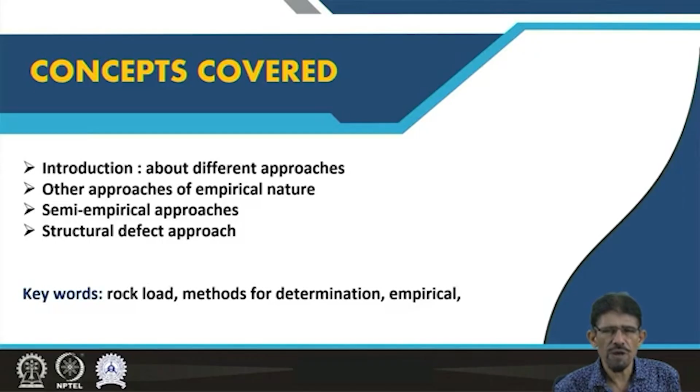As you know, we have estimated the rock load using the concept of Terzaghi for 9 rock classifications, and added RQD as per suggestion proposed by Deere et al in 1970, based on Terzaghi classification proposed in 1946.

Besides this, we have approaches based on rock mass classification carried out by Bieniawski from 1967 to 1973, then rock mass categorization proposed by Barton et al in 1974 in terms of Q index, and later utilization of this Q system and RMR by other workers who derived rating systems and indices.

As far as this rock mass quality index is concerned, the rock mass quality Q is a very sensitive index and its value ranges from 0.001 to 1000.

Between 0.001 to 1000, Barton and his co-researchers have divided the rock mass or rock strata into certain categories. You can see 3 columns here along with some adjectives - these adjectives attach with good as very, extreme, exception.

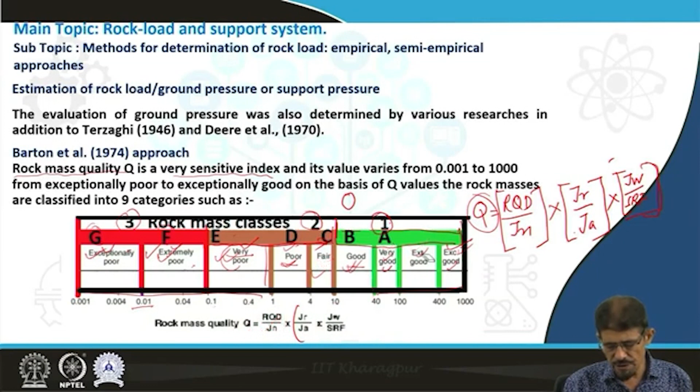A rock of particular nature, or rock strata of particular nature, having specific shear strength and located in a particular surrounding condition, can be quantified with the help of this index, philosophically written as Q. Utilizing this Q index, a number of researchers, workers, and geotechnologists have determined rock load or ground pressure.

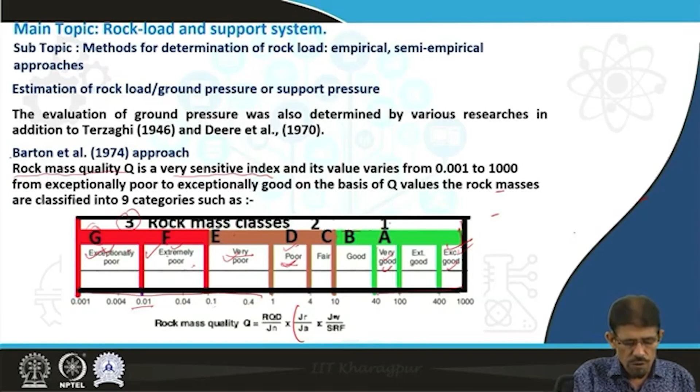The approach made by Barton et al. in 1974, based on Q, estimated the rock load. PV represents vertical pressure. The vertical pressure can be easily calculated using the concept of JR, joint roughness, and the rock mass quality index: a very simple relation, 0.2 by JR multiplied by Q power minus 1 by 3.

If we are going to create an opening here, you can see this is the strata where we create this opening. Due to creation of this opening, there is formation of a damage zone. This damage zone creates rock load, or ground pressure, or support pressure on the support system we are going to install.

The load acting vertically on the crown side of the excavated opening is recognized as PV, where the wall side pressure we recognize as PH. So PV is equal to 0.2 by JR multiplied by Q power minus 1 by 3.

However, in case of the wall side pressure, it is the same formula: 0.2 divided by JR multiplied by QW, where QW means Q for wall condition, power minus 1 by 3.

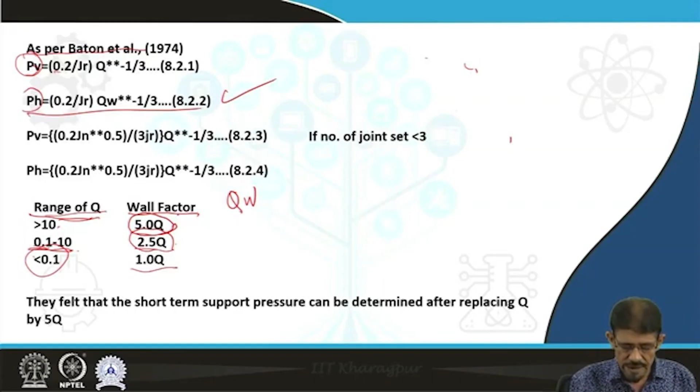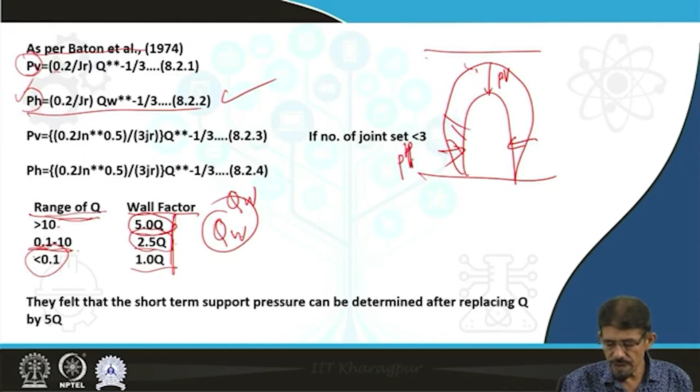Utilizing this value for QW, we estimate the pressure acting on the walls of the opening. This is the damage zone. This side is horizontal pressure, here is pressure PV, here is PH.

Condition: if the number of joint sets present in the geoground or rock mass is less than 3, then PV requires some modification. A simple modification: 0.2 times joint number power 0.5 (half), divided by 3 JR, overall multiplied by Q power minus 1 by 3. For the horizontal pressure acting on the wall side: 0.2 Jn power half divided by 3 JR, multiplied by Q power minus 1 by 3.

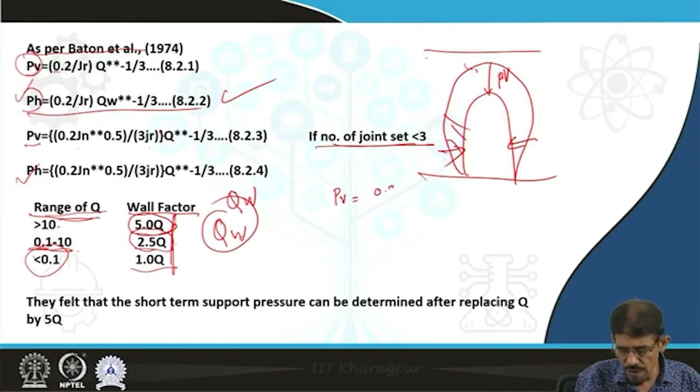PV is equal to 0.2 Jn power half divided by 3 JR, this multiplied by Q power minus 1 by 3.

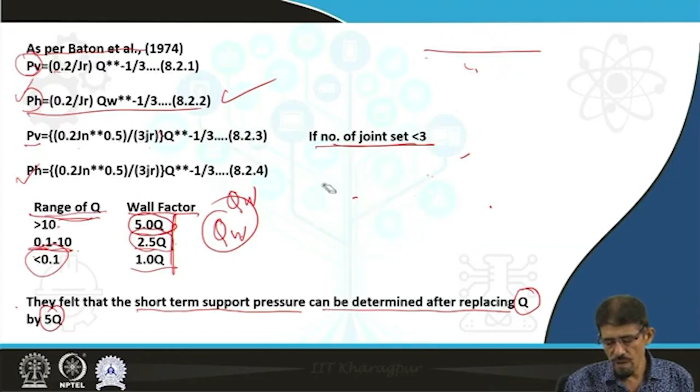In case of PH, the same formula: 0.2 Jn power half by 3 JR, multiplied by QW, Q for wall power. They found that the short-term support pressure can be determined after replacing Q by 5Q to get a more compact and authentic result, as per their consideration.

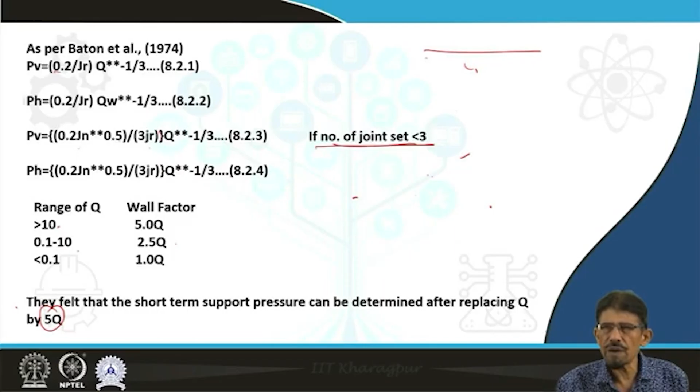Using the same concept with some modifications, Unal utilized RMR parameters, which we discussed previously. Ground pressure PV can be measured in terms of RMR, unit weight of rock, and width of opening: 100 minus RMR, divided by 100, into unit weight of rock mass and the width of opening.

As per Goel and Jethwa, 1991, they proposed ground pressure PV is equal to 0.75 B power 0.1 into H power half, minus RMR divided by 20 RMR, with results measured in MPa.

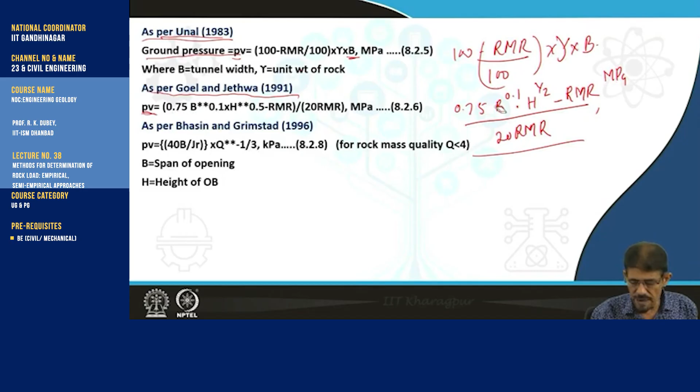Similarly, Rajendra Bhasin and Grimstad, 1996, proposed the measurement for ground pressure as vertical pressure: 40 B by JR multiplied by Q power minus 1 by 3, measured in kilopascal.

This condition was applicable for rock mass quality, meaning Q value less than 4, where B represents the span or width of the opening, and H is the height of overburden. Suppose the tunnel is located here below the ground surface; H is the height above the crown.

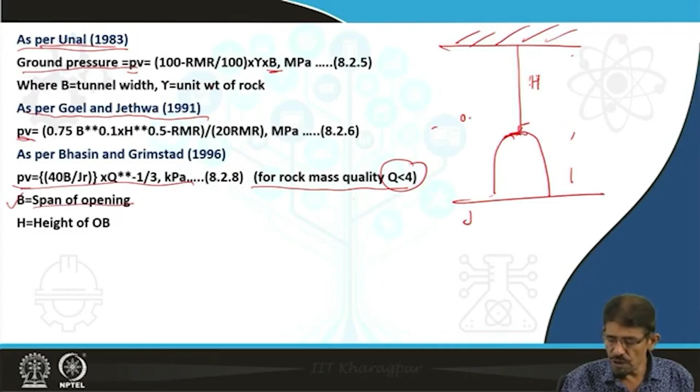This height we are recognizing as height of OB, where B is span of opening. In case of rectangular type of opening, and in case of circular type of opening, we are considering diameter.

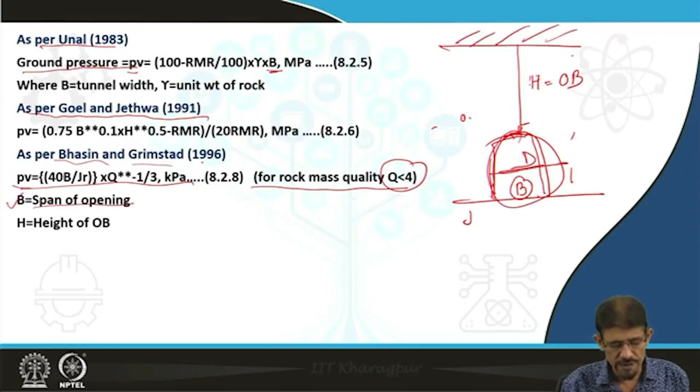So these are some of the approaches, in addition to the approach made by Terzaghi in 1946 and modified by Deere et al. in 1970. Then the calculation suggested by Barton et al. in 1974 for vertical pressure and horizontal pressure. Then a similar concept for vertical pressure was calculated by Unal in 1983, based on the rock mass rating system proposed by Bieniawski in 1967 and 1973. Then the calculation suggested by R.K. Goel and Bhawani Singh in 1995, also suggested by Goel and Jethwa in 1991, and then by Bhasin and Grimstad in 1996, both from the Norwegian Geotechnical Institute.

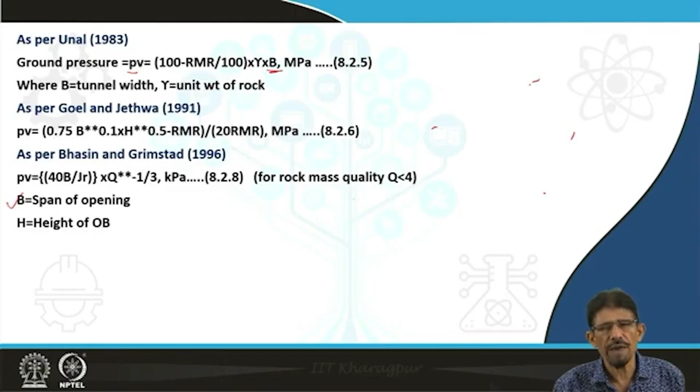In addition to this empirical relationship, day by day we are utilizing these to develop more empirical relationships for calculation of rock load, and there is a lot of scope for working in this direction. We are still lacking exact calculation of vertical and horizontal pressure, particularly in squeezing and swelling ground conditions, where we encounter a lot of uncertainties regarding the behavior of ground, particularly in the Himalayan area, Alps area, and active mountain chains.

The next approach is the semi-empirical approach. This is a very old method, widely used to assume a loosening zone. This loosening zone, as per our concept already discussed, is created due to excavation of the opening. When we create any opening in any rock strata, there is development of a damage zone, and this damage zone creates a lot of problems in the form of rock load.

So this old and still widely used method assumes a loosening zone created about an opening, following the redistribution of stresses induced by excavation. According to this concept, it is assumed that a ground arch about the opening occurs, and the boundaries of the loosening zone are the lower side of the ground arch and the upper surface of the opening.

Considering this concept, the assumptions are based on this development of the ground arch criteria. The fundamental reasoning for this assumption originates from the fact that the rock mass is incapable of resisting tensile stress conditions, however capable of surviving compressive stress conditions. Therefore, as per this concept, we select a situation or design the engineering structure so that the major part of the structure falls under the compression stress zone, resisting tensile stresses and having sufficient resistance against compressive stresses.

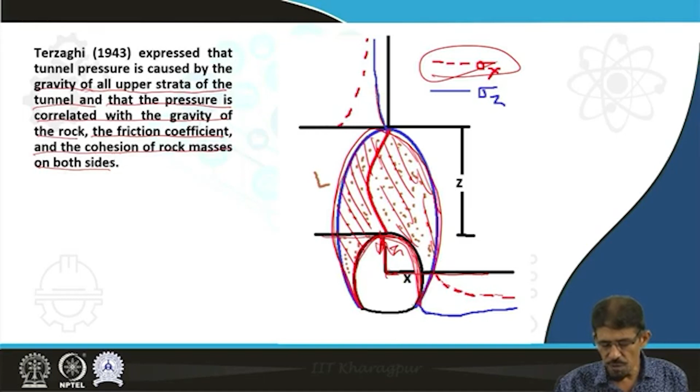So this concept was based on frictional resistance regarding tensile stress conditions and compression stress conditions. If you see, the distribution of stress along X is represented by this, and along Z is represented by this. You can see both merge at a certain point, and here also on the downside you can see them merge, but after reaching a certain extension value.

This concept, covering the length of a particular opening, can be calculated following the concept given by Janssen in 1895 and modified and utilized by Terzaghi in 1943.

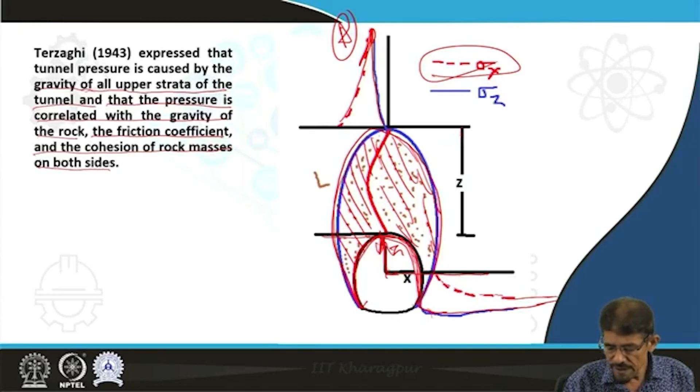Vertical pressure or vertical ground pressure can be calculated as unit weight of rock multiplied by span of opening minus 2 cohesive strength of rock divided by 2 times the coefficient of lateral pressure into tangent of the friction angle of rock. This component again multiplied by 1 minus e power minus a0 and the depth of loosening zone from the crown, this Z from the top of the loosening zone to the top of the opening, plus P0 pore pressure e power minus a0 Z.

Where a0 can be calculated as 2k0 tan phi divided by span of opening. In this way we are going to estimate about ground pressure or rock load in terms of the vertical pressure.

Where this gamma is representing unit weight of rock, B is opening width, Cu cohesion or cohesive strength, K0 is lateral pressure coefficient that we are utilizing in case of soil as proposed by Rankine or others, in form of constant we are utilizing in case of retaining walls.

Covering this concept where the tangential stress will be 0, we are going to design an opening. If the opening is elliptical in geometry shape, the tangential stress we are going to observe as 0. As per this semi-theoretical or semi-empirical approach, the created opening is unable to sustain tangential stress condition, and this induces formation of a damage zone showing lots of fall, lots of failures and others due to weak nature.

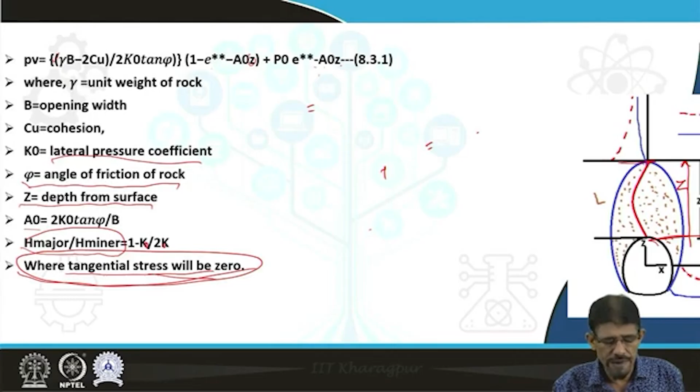This K is related to lateral pressure coefficient applied in case of soil, because this concept was taken from the concept of Janssen in 1895 that was proposed for soil originally. But later on, Terzaghi in 1943 utilized it for the tunnel rock load or ground pressure.

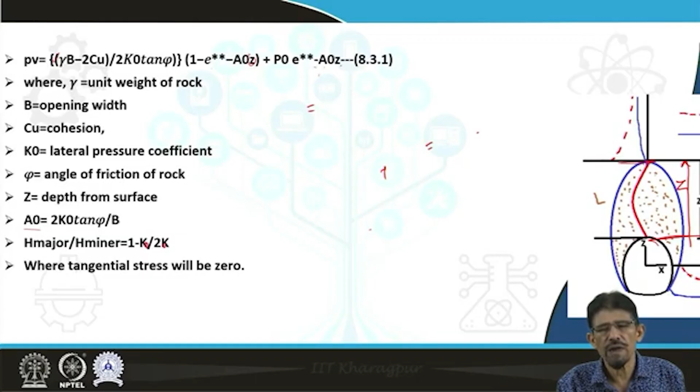Friends, this concept was developed based on the paper written by Janssen H.A. in 1895 on experiment on grain pressure in silos. It is originally in German, but now we have received an English translation, Volume 74, number 32, page 681 to 695.

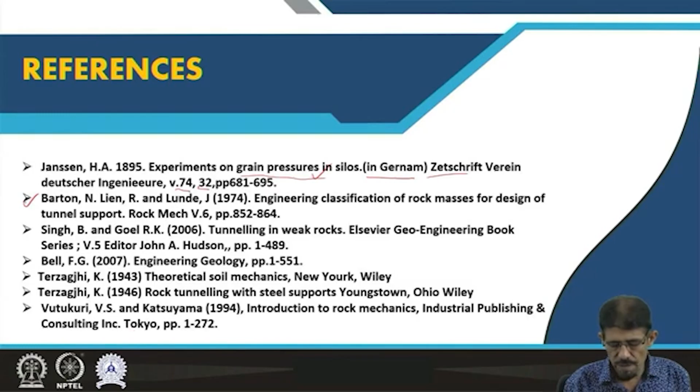Then the original paper on engineering classification of rock mass for design of tunnel support, published in Rock Mechanics Journal in volume 6 by Barton, Nick Barton, Lien and Lunde in 1974, between pages 852 to 864.

Then taken help from the book Tunneling in Weak Rocks, published by Elsevier Geoengineering, written by Singh Bhavani and Goel R.K., edited by Professor John A. Hudson, Imperial College London. Then the concept of Terzaghi from the Theoretical Soil Mechanics book, published from New York Wiley publication.

Then the concept of Terzaghi as partial support in Terzaghi K for rock tunneling with steel support, written in 1946. Then the book written by Satyanarayana Vutukuri and Katsuyama in 1994, Introduction to Rock Mechanics, published in Japan, and partial support from the Engineering Geology book, written by Bell.

Friends, the empirical approach proposed by various researchers is also found suitable for estimation of rock load with advances in this subject. The semi-empirical approach is an old method but is still widely used due to its application oriented calculation. This concept related to semi-empirical approach is simple and based on calculation having physical background.

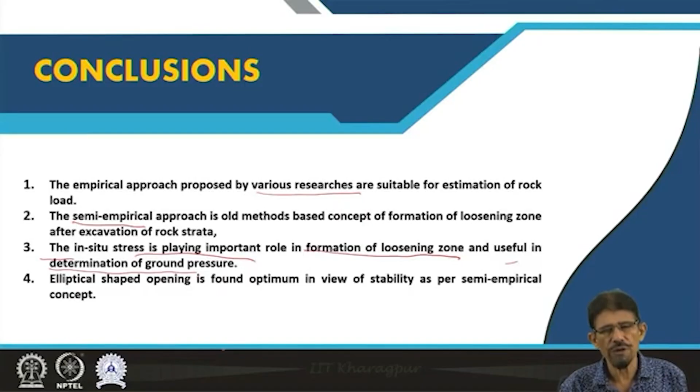In next class, we will elaborate about the structural defect approach. Thank you.